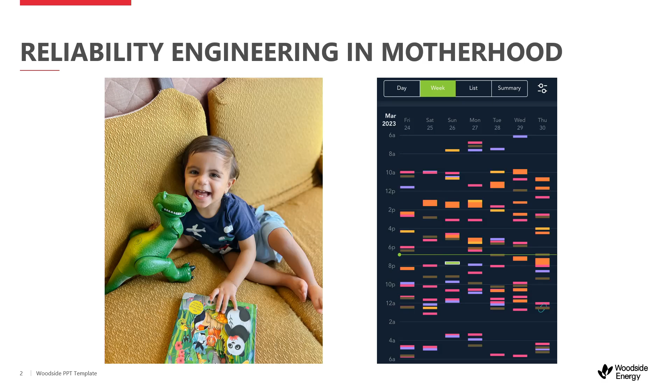So this is how reliability followed me into motherhood, and I'm here to extend it to our businesses today. I will be diving into how reliability principles unite with data science to optimize maintenance and achieve long-term savings for your business. So let's dive in.

Looking after equipment is a critical task, and it doesn't stop for asset-heavy organizations. We need our equipment to be safe, we need it to be reliable, and at the same time, we want to minimize our life cycle costs. This in turn improves our profits and also impacts our emissions. How many businesses can say that they, hand on heart, are able to achieve this?

This question becomes more and more complex when you have hundreds to hundreds of thousands of equipment across assets and across the world. And that's the landscape that Woodside operates in. It was this complexity and this necessity that really drove our business to think about how do we look after our equipment better, and how do we optimize the maintenance strategies?

So what is maintenance strategy optimization? Simply put, it's doing the right maintenance at the right time with the right tools. It really is a balancing act of reliability, production, cost, and downtime, while always ensuring that we meet our safety targets and we're minimizing emissions.

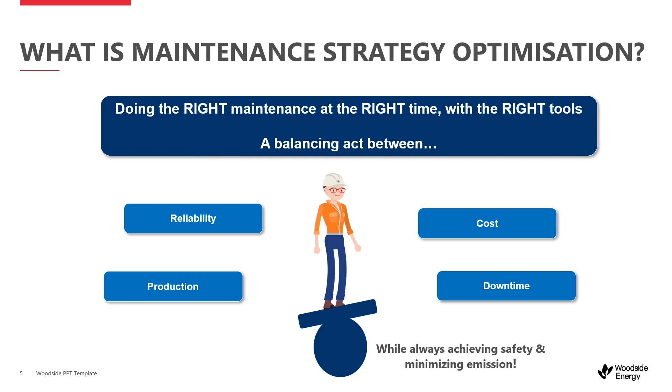In the pursuit of optimal maintenance, we encounter several challenges, and these challenges I'm sure many other businesses face. Where are we maintaining our equipment too much or too little? How do we analyze hundreds of thousands of equipment effectively? What data do we need to support strategy optimization? Are we addressing our failure modes? How do we optimize with gaps in our data? And how do we do all of this efficiently and sustainably in the business?

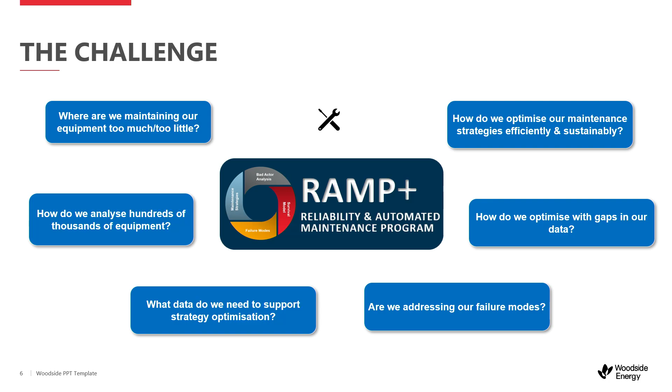So these were the fundamental questions that we had to ask ourselves, and it drove us to innovate and develop our own in-house strategy optimization tool, named Ramp Plus. And I'm here today to really dive into the nitty-gritty of what this tool does so that you can leverage what we've done and apply it in your business. So let's dive in.

Enter the optimization tool. The tool is built on a 4-step process, and it was built hand in hand with the process to deliver the outcomes. The 4 steps are broken down here. The first step is to find. We need a way to effectively find the equipment that is not performing well, and what I like to call bad actors.

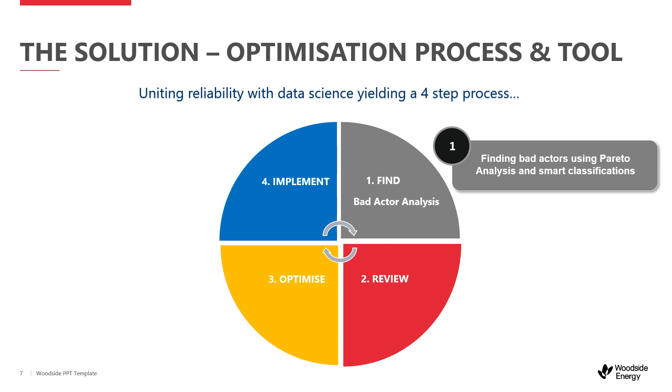We then need to understand what's happening to our equipment. We need to review the data. We want to use our data that we've collected over many years to understand what's going on. Third, we want to optimize. This is where we take our knowledge and we do optimization using the data that we've got.

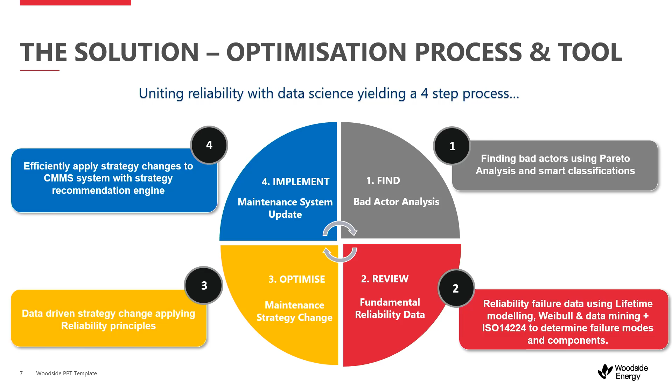And then finally, to finish it off, we have to efficiently apply this into our maintenance management system to actually see a saving or a change. So these are the core 4 steps, and I'm going to dive into them in a bit more detail. So starting with step 1, what are your bad actors?

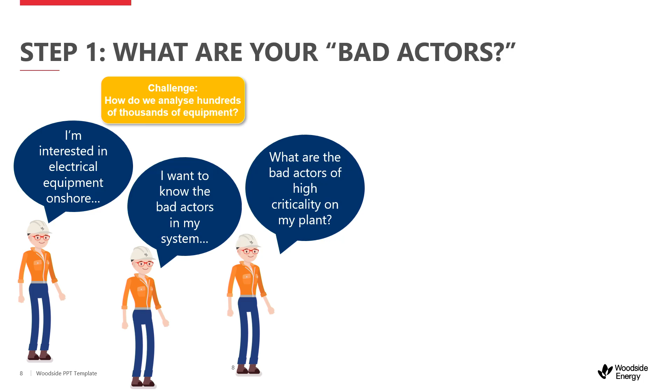So this is where we face the first challenge. How do we analyze hundreds and thousands of equipment? And then how do we do this efficiently so that all our stakeholders who are interested in different cuts of our equipment are satisfied? Our approach involved breaking down our data based on our asset hierarchy. Very simple. We further classified this into business roles, equipment, and criticalities. So we really tailored this to our business needs. This allowed us to slice and dice over 200,000 equipment into manageable chunks.

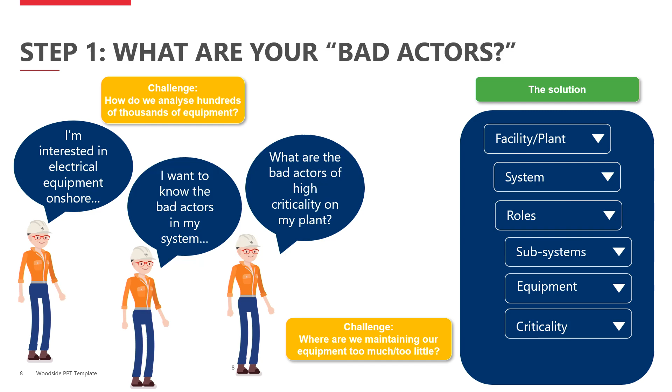From here, we hit a second challenge. Where are we maintaining our equipment too much or too little? Where are those bad actors? So we need a way to be able to compare our equipment. We need a metric that we believe is reliable and available for all our equipment types. And for our business, that looked like maintenance costs and maintenance hours.

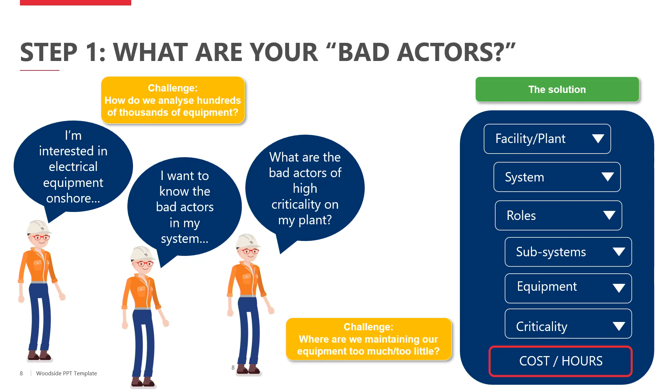From here, we applied the famous Pareto analysis, the 80-20 rule. We only have so much resources. We really need to focus on the equipment that's not performing so well. And the 80-20 principle can guide us with that. If we focus on the top 20%, we're hoping that we can hit 80% of the problems we're facing.

Now, putting it all together, we came up with a very smart classification. So the Pareto analysis allowed us to cut our data into a matrix view. We all love matrices. And we had 4 distinct sections that I'll take you through. So the very first quadrant that we're looking at on this matrix graph is what I call the not a bad actor region. We're happy here. We have equipment where we're not spending too much money or too many hours on proactive and reactive.

The first red section right up the top, this is where we have relatively high reactive work costs or work hours compared to our proactive work hours or costs. So this region, we named it as potentially under-maintained. We may be under-maintaining here. Moving across, where we have high reactive and high proactive work cost and hours, this region indicates that we may be maintaining our equipment incorrectly. We're spending a lot on both types of maintenance.

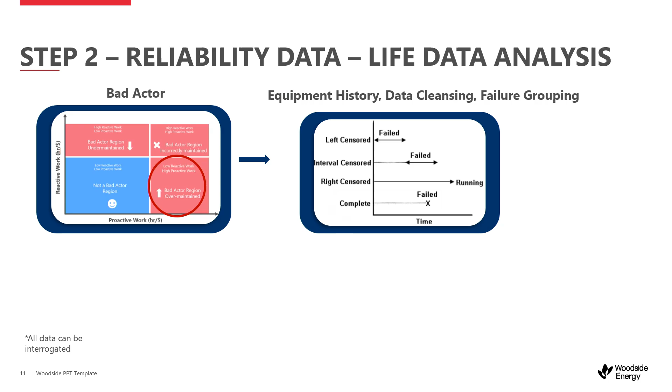By having this data set, we put this into a survivability model. You may have heard of it, the Kaplan-Meier estimator. So this describes the behavior of your equipment, and it describes what's the probability of it lasting based on past data.

This then fed into what reliability engineers like, the Weibull parameters. So we were able to get out the Weibull parameters, mean time to failure, mean time to repair. And we were able to compare this to industry standards. So what we did here was actually use our own data, our equipment history, to see how that equipment was failing and comparing it to what we expect in the industry.

So from here, with our Weibull parameters, we can take the beta parameter, which describes the failure pattern, and have a look at the bathtub curve that I'm sure many have seen before. The beta parameter helps indicate where we're sitting on this bathtub curve and also alludes to the type of strategy that we can employ. So for early life failures, an appropriate strategy generally is to understand why our equipment is failing so quickly once it's put into service.

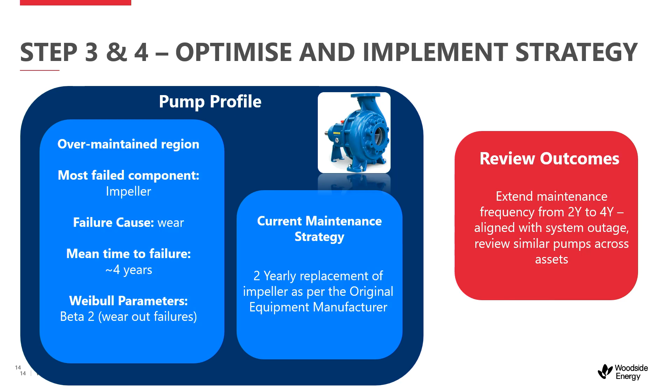So piecing all these bits of data together and then having a look at what we're currently doing, which is a 2-yearly replacement, we can see a clear gap. We can see that there's optimization opportunity here that our tool has showed us. And the potential here is to actually extend our maintenance frequency from 2 years to 4 years and align it with any shutdowns that we have. So further to this, there may be some scaling opportunities. We've just looked at a pump. There may be a similar pump across our other assets. So we can apply this strategy perhaps to other parts of the business too. And that is a direct impact to our costs.

So in summary, we've used Pareto analysis and smart classifications to understand the equipment that's not performing so well. We have used lifetime modeling, Weibull, and data mining to understand the failure modes and the failure patterns sitting behind the equipment. We have pieced all of this together to understand how we can optimize our strategy and use a data-driven approach. And finally, we need to make those changes into our maintenance management system.

Now, we all know a tool's only good if people are using it. So how did we take this tool to the business and have seamless integration? I'll take you through that. So firstly, we needed support from our leaders. Our leaders needed to be aligned with the intent of the tool and what we were trying to do. From there, we were able to train our key stakeholders on the tool and the process. We held dedicated optimization workshops. We had our engineering, maintenance, and operation folks put together in a room to dedicate their time for strategy optimization, supported by reliability engineers.

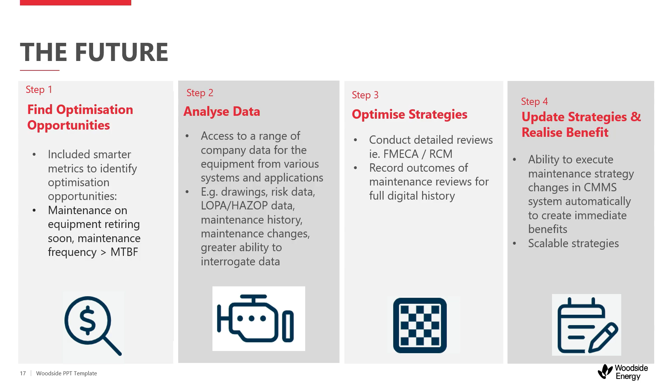Step 3, the optimisation piece. We've built in FMECA and RCM modules. This allows us to record the outcomes of our strategy reviews, and it retains a digital history of this. And then finally, in step 4, realising the benefits, we've started looking into how we can automate the processing of these changes. So how can we make these changes much faster in our maintenance management system? And how do we scale this across different assets?

So in conclusion, the principles of reliability engineering are not just theoretical concepts. I've unknowingly used them in my motherhood journey and applied them in the field of maintenance strategy optimization. We are in an era of advanced algorithms, machine learning, AI, predictive maintenance, real-time equipment data that's really transforming the asset management space. There's a lot happening and it's really exciting. But we must all remember that the core reliability principles are the foundation of this work. When things get complex, come back to the basics because they really work.

Now that you've witnessed reliability and data science unite, I can't wait to hear how you apply this in your business or your parenthood journeys. Thank you.

Hey, thanks, Shereya. That was amazing, right? I always enjoy listening to real-life examples where, especially reliability engineers, are able to take information, turning it into meaningful knowledge that allow for actions that deliver better results. So well done, congratulations. Now we do have some time for some questions, but if you've got a question, put your hand up and somebody will bring a mic to you. Okay, here we go.

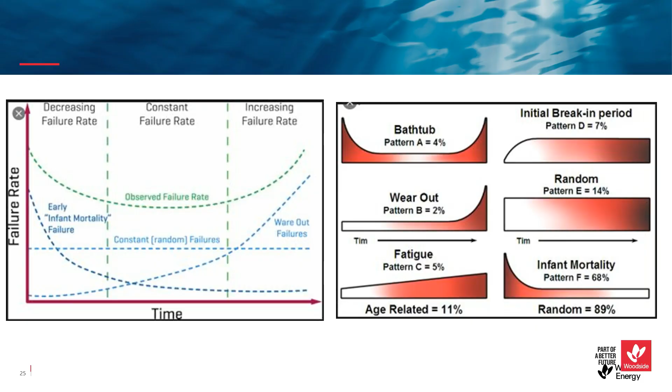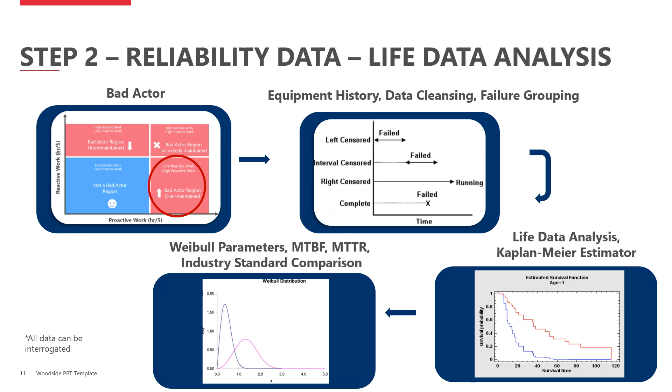Just going back to the slide deck around the actual reliability side of things. So when we try to understand the Weibull parameters, the output of doing all of this, we do some failure grouping. So we want to find like equipment. We know that with one pump on the plant, we may not have enough data to make any informed decisions. But we do have a number of pumps on site that are very similar operation, similar type of pumps. So we can do some smart classification. We can grab like equipment, like pumps, and use their data combined. So that's the first part.

And then secondly, around the word cloud. The reason we even use word cloud is because we know that in our notification and maintenance data we don't always have the correct coding. So the word cloud was a way for us to use that rich text and actually draw upon what could be happening, because a lot of the time we're typing and saying that we need to fix this and do this because of this, but we may not have coded it properly. So that's why we use the word cloud functionality with the groupings to get more data.

Tell you what, and when you're done, can you pass it behind you?

Yeah, thank you. I love the simplicity of the word cloud, but I'm really interested in the data cleansing that may have gone through with that. You know, there's 7 different versions of writing pump, and anything that you may have had in that respect.

Yes. So obviously we do write things differently. It's all free text, so we have to be smart with how we grab that information. So that was all built into the tool. We use data science to help us. So I guess we really had to dive into the data, so we had a good understanding of what the data looks like.

Where do we potentially see some issues if we were to use word cloud functionality? So by understanding the data, we're able to tailor our solution. So if we know that we're perhaps saying pump but spelling it wrong, our word cloud was able to actually pick up those words and cleanse it. Yeah.

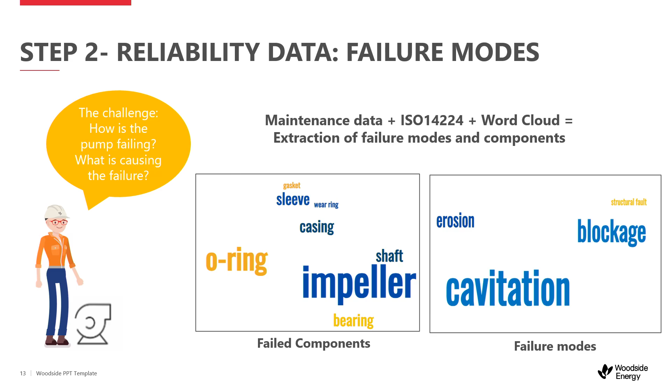Hi. Where in this process do you take into account business requirements? So I guess on the plant, if it's ramping up or ramping down, that will then affect the wear of your components. I'm just wondering where that fits into this process. Let me have a think.

So you're right around the business requirements. The 4-step process was very simple. You could see that we're really just picking up things that were standing out to us as high cost or high proactive and reactive. And as part of the future, what we started working on was pulling in other metrics to understand where we're performing poorly.

So looking at historical performance trends, process trends, all of that actually fed into here. So we were able to dive into the process side of things as well, so not just the equipment side and the equipment failures, but what we were doing on the plant at that time.

Okay, we still have a couple of minutes if there's any more burning questions. Here we go.

Has the tool changed people's behaviours in how they write information in the notifications or in closing comments? Is this driving a cultural change as well? That's a really good question, and that's something that I'm very passionate about, because as reliability engineers, we cannot really make data-driven decisions if the people that are writing our notifications and recording that failure data are not doing it correctly. We simply cannot do our job.

So a big part of the rollout was to have the key stakeholders involved. So we had our maintainers, we had operations, and there are 2 key stakeholders that do put in maintenance data in our system. So I guess the hope was that with the training and the understanding of why we're doing this, and the drive from the leaders, that has cascaded to those people that actually record our failure data.